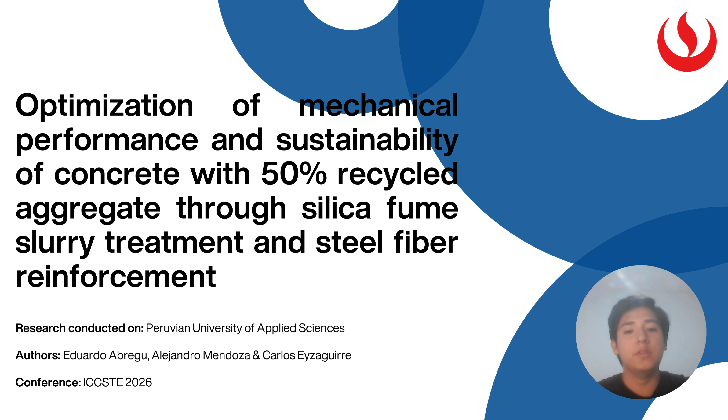Good morning, everyone. Today I will present our research on improving the mechanical performance and sustainability of concrete containing recycled concrete aggregate through silica fume slurry treatment and steel fiber reinforcement.

The construction industry generates enormous amounts of construction and demolition waste, while simultaneously consuming large quantities of natural aggregates. In Peru, thousands of cubic meters of this waste are produced every day, creating significant environmental challenges.

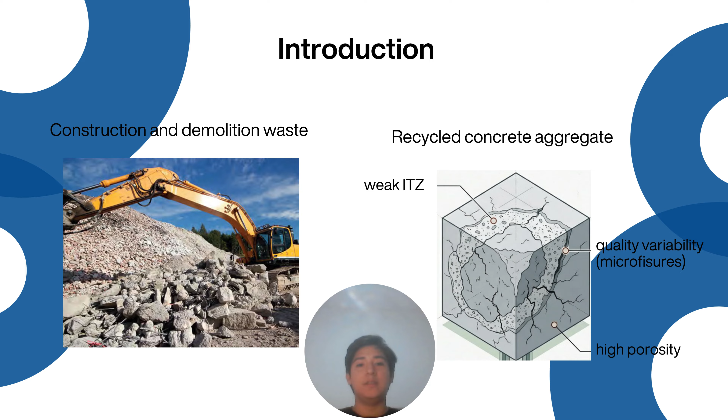Although recycled concrete aggregate is a promising sustainable alternative, its application is often limited because it reduces the compressive strength of concrete. Therefore, our research aimed to overcome this limitation by treating the recycled concrete with silica fume slurry and reinforcing the concrete with steel fibers.

The objective of this study was to evaluate whether concrete containing 50% recycled aggregate could achieve equal or better performance than conventional concrete while reducing environmental impact.

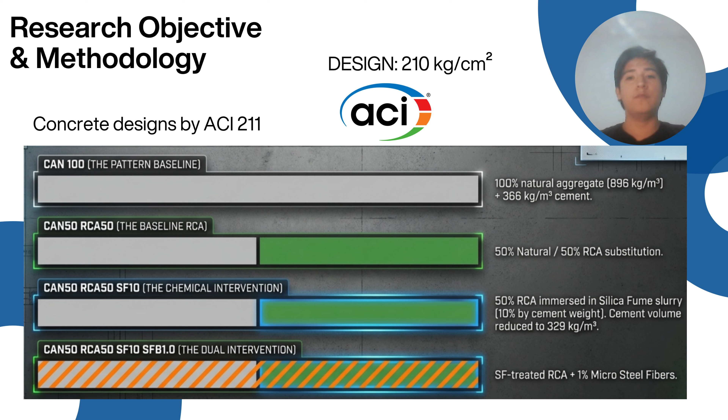Four concrete mixtures were designed according to ACI 211 recommendations. The first was conventional concrete and served as the control mixture. The second incorporated 50% recycled concrete aggregate. The third included RCA treated by immersion in a silica fume slurry for 24 hours. The fourth combined the silica fume treatment with 1% steel fiber reinforcement.

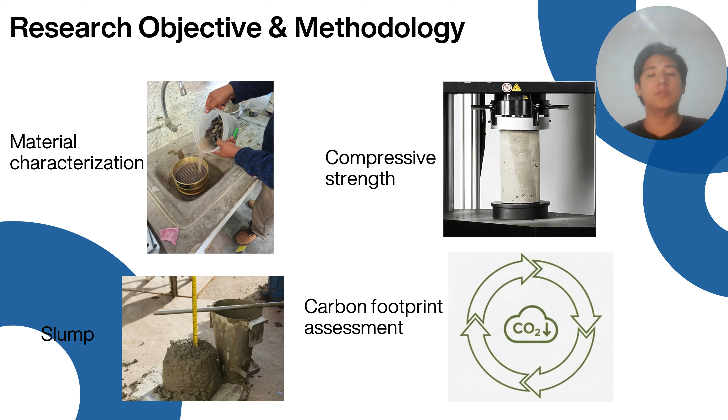The experimental program included material characterization, slump testing, compressive strength testing at 14, 21, and 28 days, and finally a carbon footprint assessment.

Regarding fresh concrete properties, the control mixture, the RCA mixture, and the silica fume treated RCA mixture all achieved plastic consistency, with slump values between 3 and 4 inches. The silica fume treatment could be ideal for building frames.

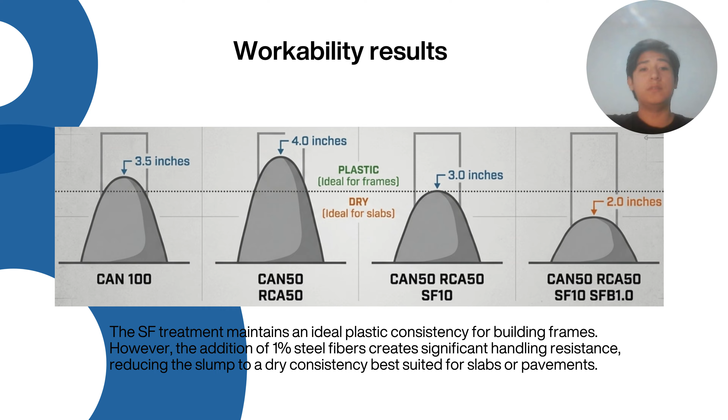However, the addition of steel fibers reduced the slump to 2 inches, resulting in a dry consistency, best suited for slabs or pavements. We can see here all the results obtained on the compressive strength test.

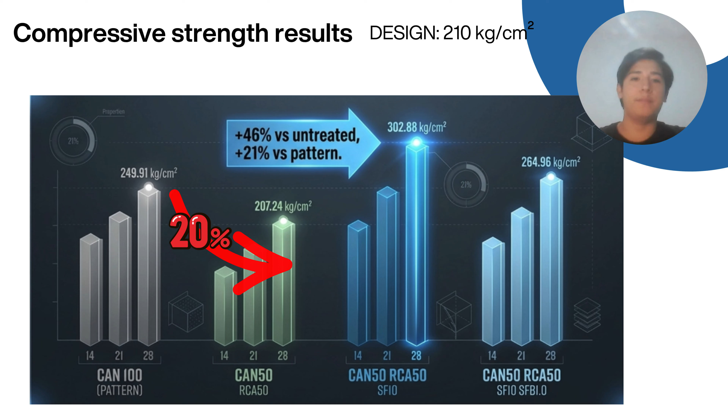As expected, replacing natural aggregate with untreated RCA reduced compressive strength by approximately 20% compared with conventional concrete.

However, after applying the silica fume slurry treatment, the results improved significantly. At 28 days, the treated RCA mixture achieved an average compressive strength of 302 kilograms per square centimeter. This represents a 21% increase compared with conventional concrete and a 46% increase compared with the untreated RCA mixture.

These results indicate that the silica fume treatment effectively improves the microstructure of recycled aggregate by sealing pores and strengthening the interfacial transition zone. Also, it's important to analyze the image below, which exemplifies how the failure goes on.

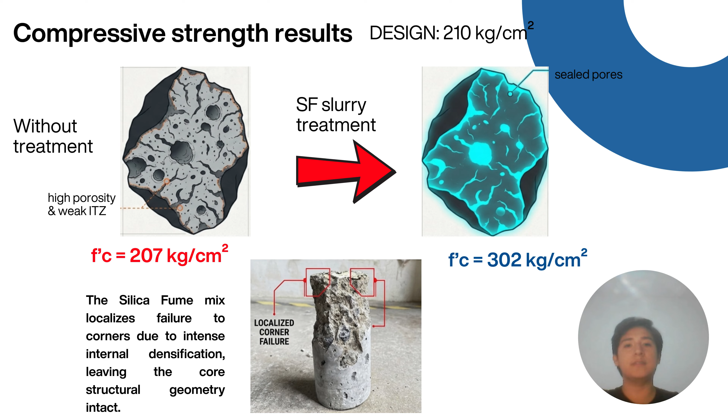The silica fume mix localizes failure to corners due to intense internal densification, leaving the core structural geometry intact.

The mixture containing both silica fume slurry treatment and steel fiber reinforcement achieved a compressive strength of 265 kilograms per square centimeter, which remained 6% higher than conventional concrete and 28% higher than the untreated RCA mixture.

Although this result was lower than the silica fume only mixture, the steel fibers improved the failure behavior. Instead of experiencing sudden fragmentation, the specimens maintained their integrity after cracking because the fibers bridge the shear cracks, showing a more ductile failure mode.

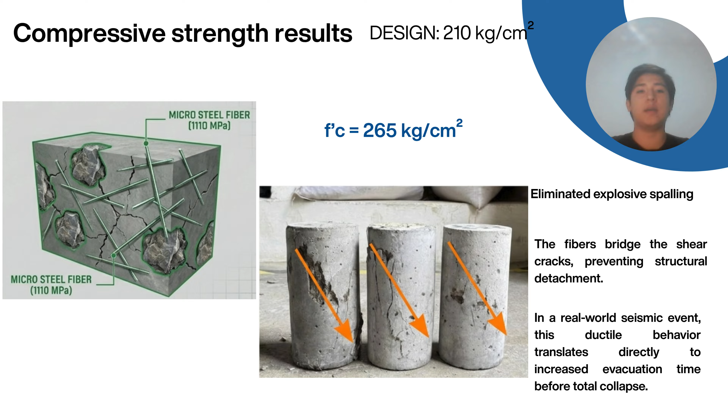This behavior is particularly beneficial in seismic scenarios because it can provide additional warning time before structural collapse.

In addition to improving strength, the proposed mixtures demonstrated environmental benefits. A carbon footprint analysis was performed using emission factors associated with all the materials.

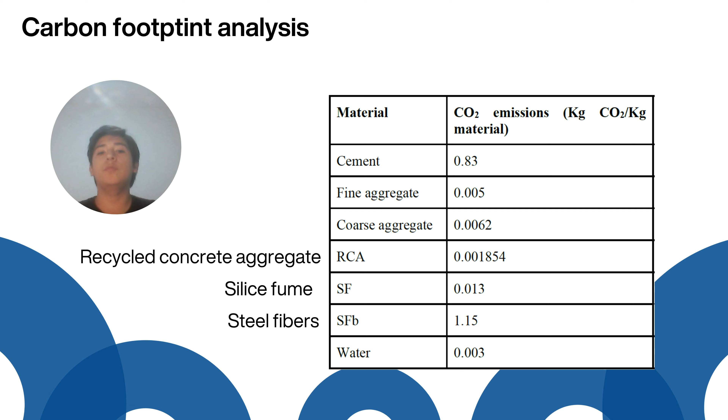See on the presented table that the RCA emission factor is lower than the coarse aggregate factor, and also see that the silica fume emission factor is lower than the cement one.

The results showed that mixtures that use 50% recycled aggregate and 10% silica fume generated lower carbon emissions than conventional concrete, because carbon dioxide emission factors were lower than the coarse aggregate and the Portland cement, respectively.

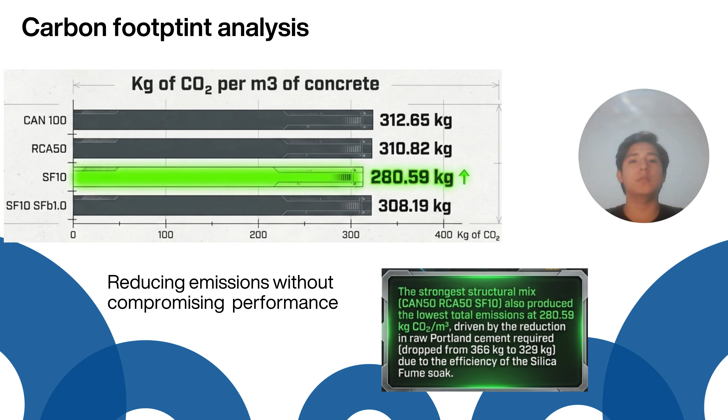The silica fume treatment mixture reduced carbon dioxide gas emissions and also improved the mechanical performance of concrete. Therefore, the proposed solution contributes not only to improved mechanical performance, but also to waste reduction and resource conservation.

In conclusion, this research demonstrates that recycled concrete aggregate can be successfully incorporated into structural concrete when appropriate treatment methods are applied. First, the silica fume slurry treatment recovered and even exceeded the strength of conventional concrete, surpassing it by 21%.

The addition of steel fibers improved post-cracking behavior and structural integrity, adding vital resilience against seismic scenarios.

Furthermore, the proposed mixtures, with the replacement of 50% recycled aggregates, reduce carbon emissions while promoting the reuse of construction waste. Therefore, this approach represents a practical and sustainable alternative for future concrete applications and contributes to the development of a more circular construction industry.